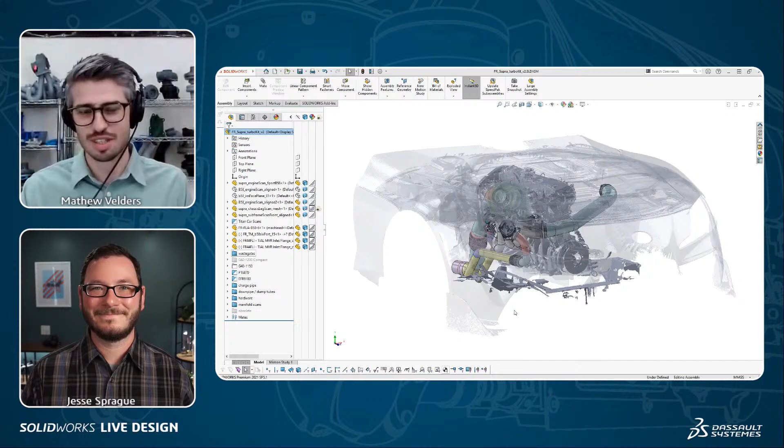It's a water-to-air intercooler, but the Papadakis racing car uses a traditional air-to-air front mount intercooler. So there's lots of important differences. So to work on the production kit, we partnered with Titan Motorsports in Florida, and they found a very generous customer who was willing to let us borrow their car for far too long to develop the kit. So thanks, Ollie, if you're out there watching, we appreciate it. We're really thrilled with how the kit turned out.

So the production kit needed to be more than just a turbo manifold. It needed to include the charge pipe for the original style intercooler in the inlet manifold. It needed dump tubes, downpipe, and so the development of the manifold into a kit had a lot of iteration. So they shipped the car to us. We work with Creaform. You may notice that this engine bay scan is maybe a little bit over the top. It was a bit more than what was needed for the turbo kit, but I was playing with a new toy and having fun with the HandySCAN, so got a little bit carried away.

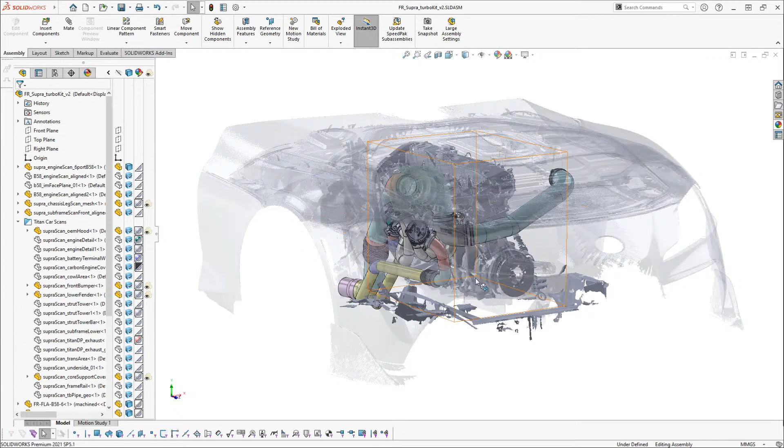So we scanned the engine bay and brought that all into SolidWorks and started with the original model that we did with Papadakis Racing, and so there was a bit of a unique use of CAD software in this, where the manifold was fully designed in CAD and mostly built to that model. But a lot of the rest of the kit, like the downpipe and the dump tubes and the charge pipe, was more concept design in CAD.

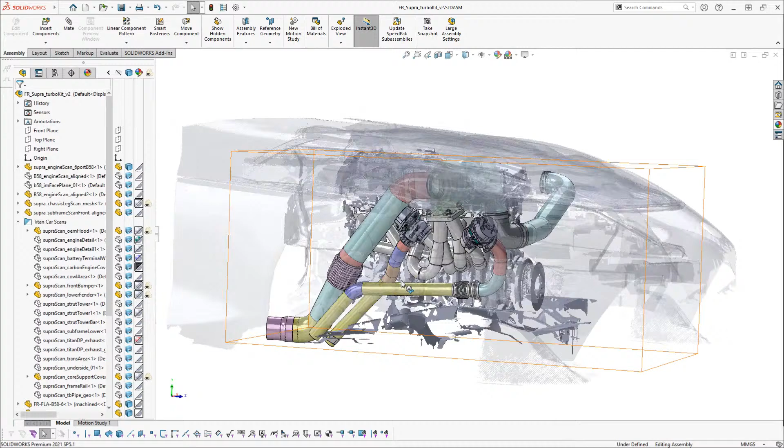And then I worked with our talented fabricators here, and we went back and forth, and they'd look at the scans and the model, and we figured out where things needed to be roughly and what we could fit. It was really important to Titan to have a 3.5-inch downpipe on this kit, and it's pretty tight and it was difficult to fit. So that had us move the turbo position around a little bit. We had to move the wastegates around a little bit.

There was not a lot of clearance in this area here, where you can see this Garrett wastegate. It's tight to the frame rail. It's close to the downpipe, and you don't want to get too much heat around this top hat here, to protect the wastegate.

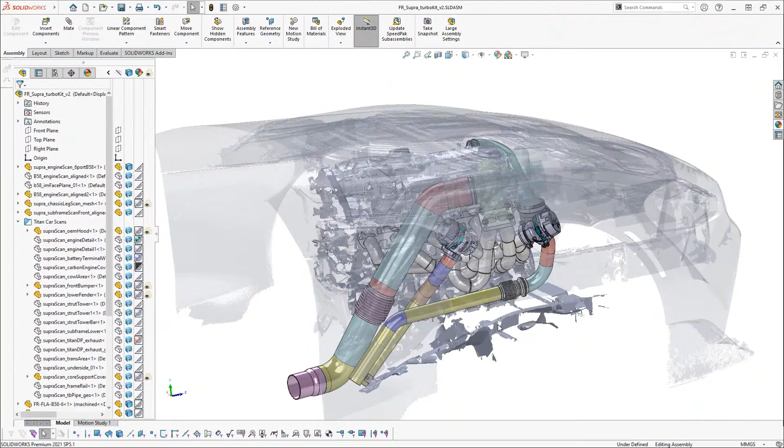So I would go through figuring out some layout concepts and what would or wouldn't fit, and the fabricators would look at it and give me feedback, and we'd go back and forth. And then once we had a good idea of what should fit and where, they took this image and went and laid it out on the actual car. And then, of course, there was a bit of back and forth.

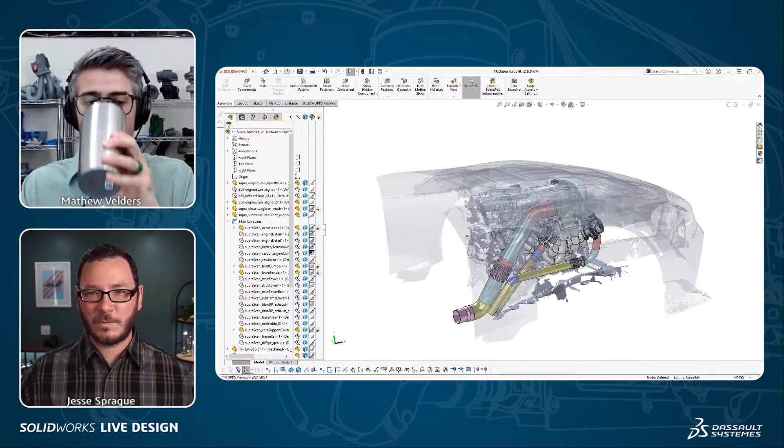It's such a great combination, alluding to what I said before of street smarts and book smarts, right? You've got this super high tech 3D scan, right? And then at Full Race, you've got the knowledge to know exactly how things are going to lay out, and joining those two together is super cool.

Yeah, and I really like to defer to their knowledge, because most of these guys have been fabricating these kinds of components on cars for longer than I've been using CAD software. So they have a lot of really good input. And I'm not going to pretend that I could do a better job in SolidWorks than they could on an actual car, but it definitely saves time to work through some of those concepts and layouts in CAD, rather than the time and material that would go into them figuring this all out. Sure, absolutely.

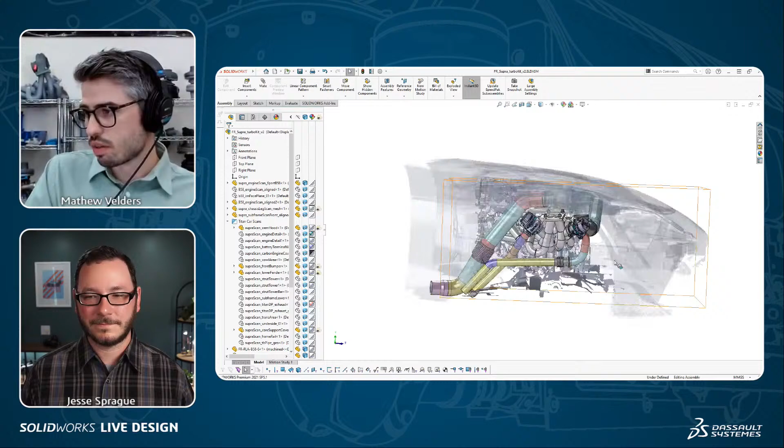Yeah, so there's a lot going on here. It's a big assembly. Well, for me, it's a big assembly. So I worked through the concepts for charge pipes and downpipes and dump tubes, and then they built something on the car, and then I ended up replicating what they built in SolidWorks afterwards, so that I could make a drawing with a cut list and a general assembly layout for the downpipes and

dump tubes. And then if we get some of the components CNC bent, we can use the models to check to make sure that they're what they're supposed to be. Yeah, very cool.

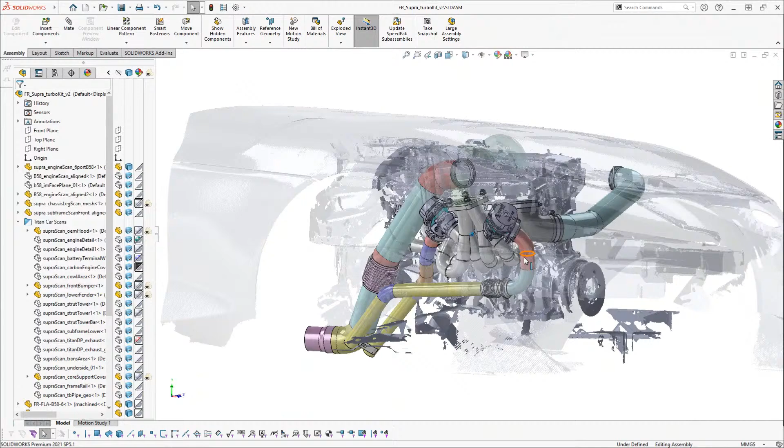So in terms of heat, you mentioned you're working on an exhaust system, so heat's a big deal. How do you guys handle that? Do you do any simulation or flow, just to see where heat might be going? I know it's probably tough because it's in a moving vehicle, so there's a lot of air potentially flowing through there as well. But are there any tools that you use to get an idea of where heat might be going, or is it just, an inch in between is going to be okay for what this component can handle?

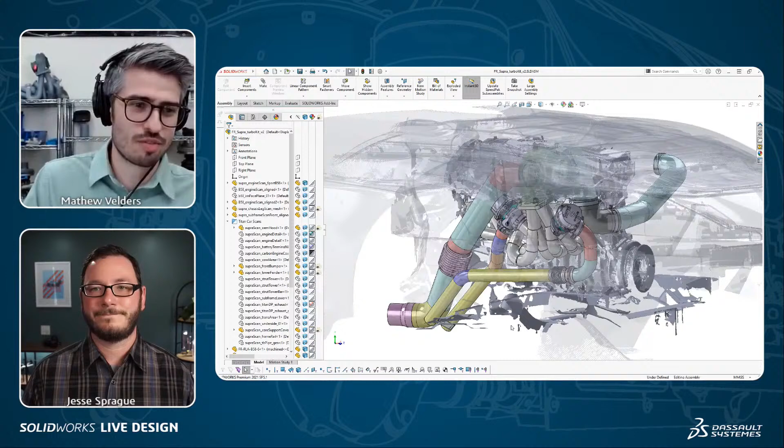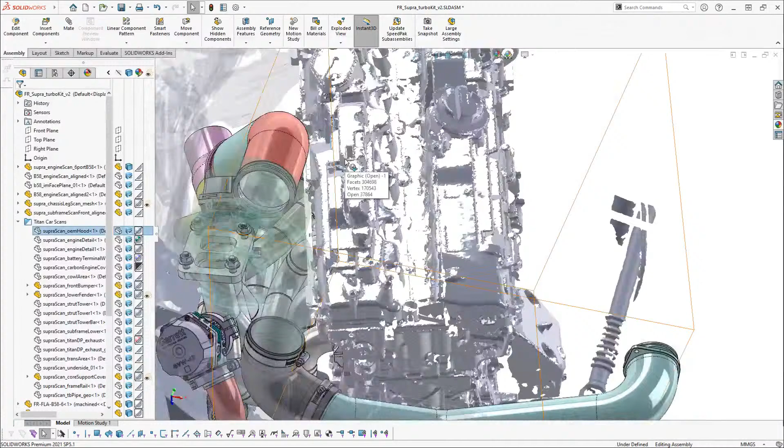I'd say it's a bit of a combination. Some of the analysis work has been done, but Full Race has been doing this for 20 years, so they've got a pretty good feel for what will work and what won't. But there's definitely concerns with this. Here, let me hide some of these scans. This valve cover here is plastic, and it can definitely take a lot of heat, but it's an area of concern for sure.

Actually, just recently, the Papadakis Racing GR86, which has a B58 swapped into it, unfortunately DNF'd at an event because their turbine housing was a little bit too close to that cover, and they thought that it would be good, but it wasn't quite. So lesson learned. Sure. Interesting.

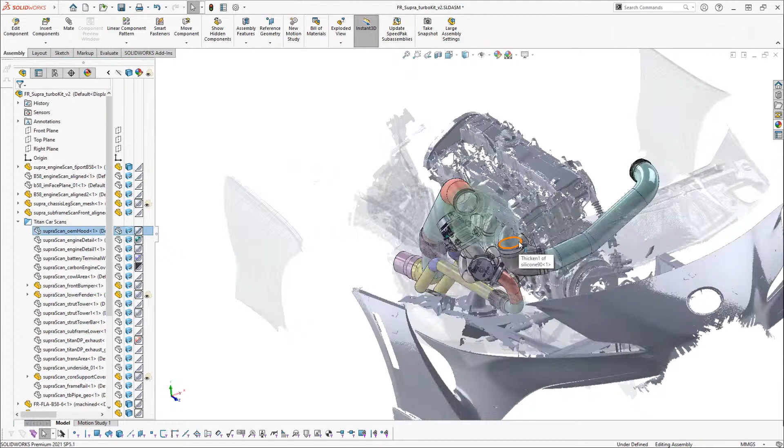Yeah, so the approach to building something like this, you could start with the scans and pick your turbo location in CAD and rough out your wastegate locations in CAD, or you could mount them in the engine bay on the physical car and pick what you like that way, and then scan the location and go about it that way. For this project, Full Race was already making a... So I guess I should back up a little bit.

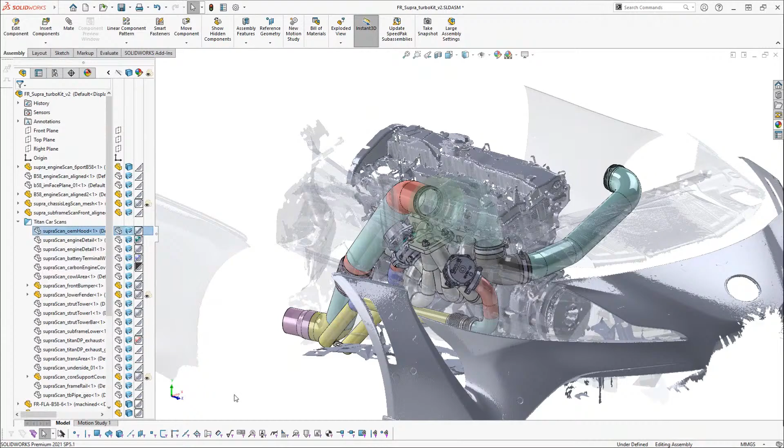The 2020 Supras had a cylinder head that only had two exhaust port outlets. Most of the manifold was built into the cylinder head. So cylinders 1 through 3 merged into one outlet, and cylinders 4 through 6 merged into a second outlet. So we were already building a manifold for the 2020 two-port cars, and we wanted to use that turbo location as the starting point for this kit. Okay. So are there two different versions of this? Because when I was looking around a little bit, I did see some like that.

So now, as far as the turbo placement goes, who was making the decisions? You said you were working with Titan. Who was making the decisions on what turbo it was actually going to be, and driving the housing size and all of that stuff? Was that you guys, or was that Titan, or a combination?

In the beginning, it was us when we were working on the initial two-port kit, and the kit was developed around a BorgWarner EFR 9180, or I guess the 9280 is the largest one that they offer, but they're the same overall size. Actually, that's one right behind me there on the shelf. So it's a pretty big turbo, and that was what the kit was based around.

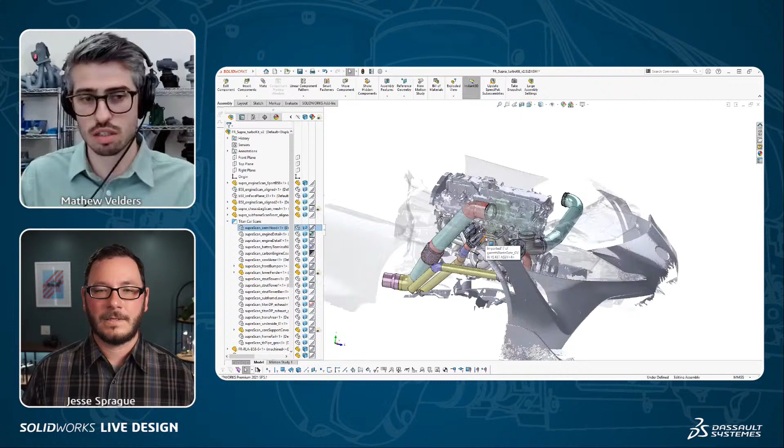Titan wanted the option to fit larger turbos, which actually wasn't much of an issue with the original turbo location, but the requirement for the 3.5 inch downpipe made a pretty big impact on the turbo location. We actually had to move it up a little bit, and it just bought us a little more clearance to snake the 3.5 inch downpipe down through and have it far enough away from the cam cover and far enough away from wiring harnesses and that kind of stuff.

Yeah. We have a question: you mentioned that the Papadakis project was 48 hours, but how long does something like this take you to model? Did you do a full model of this when you're going through that process, or did you go part way, since you already had a jump start with the 3D printed one? What was the time span on a project of building a model like this?

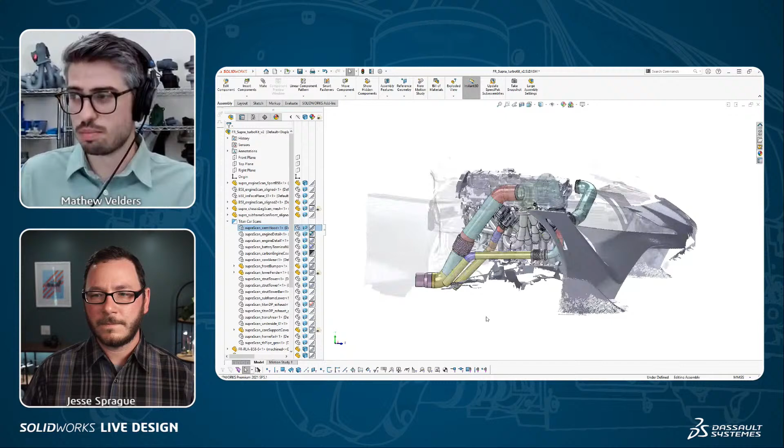Yeah, so the one that I initially did for Papadakis was like 48 hours start to finish, and that included completely modeling the manifold, a couple 3D printed fixture models to locate the turbine inlet flange to the cylinder head flange, and turning all of the solid models into CAM files that could be cut out on a CNC plasma cutter.

Cool. Normally, I would say 48 hours is not nearly enough time to do something like that and think everything through properly. And it definitely had its flaws. The wastegate positions weren't the greatest. They're not as good as they are now. They were a little bit close to the frame rails, but in a race car that's using solid or near solid engine mounts, it doesn't really matter.

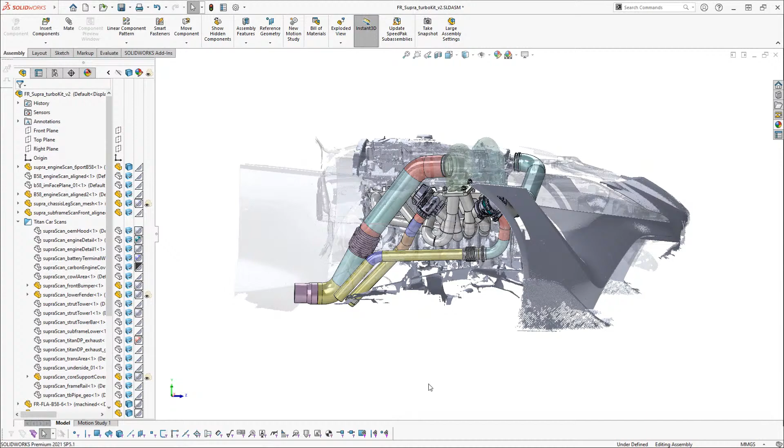Sure. Something like this model that I have here was built over the span of probably a couple months, but that includes going back and forth with this project, spending time on other projects, and juggling a much larger workload than just saying, you've got 48 hours, go. Yeah. I think our entire audience would say 48 hours is not ideal. Oh, very cool.

So we started with a scan of our original 2-port manifold, and that kind of gave me the turbo location for this one here. If I go back to the top of the tree here, once I bring a scan in, I just do a 3D sketch with X, Y, and Z dimensions and a couple angles. Let me open this up. So I've got a fully defined sketch there, and I don't have to worry about anything moving on me, and if I need to adjust, I can just move it up or down or forward or backwards or whatever I need to do.

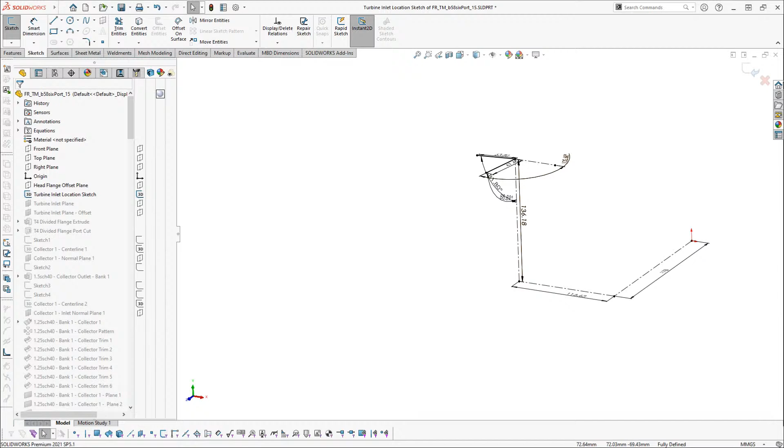So now when it comes to the scans, anytime I've worked with scans in the past, it's always like, oh, you just point this little gun at it and then you get a model. And it's like, well, no, that's not at all how that works. There's quite a bit that goes into it. So what's your process for coming off of a scan for something like the manifold that you're actually going to need to reference?

Do you go in and put a surface on there, or do you just rely on that sketch and eyeball it off of that, or what's your process there? Yeah, that's a great point. So we use Creaform's software to both do the scanning and modeling.

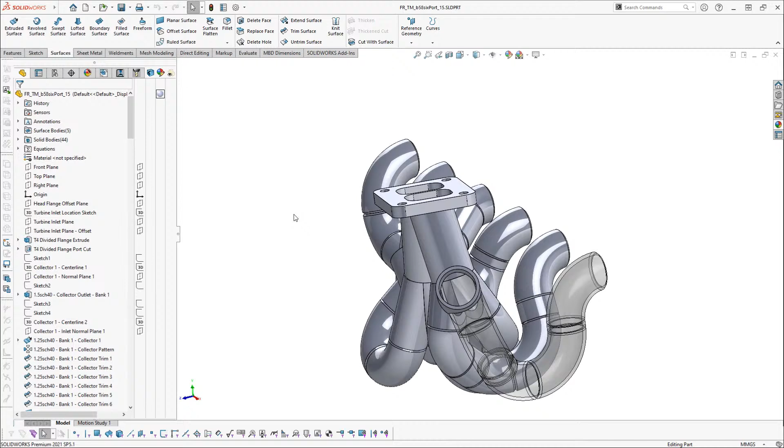It's mostly, I just like to have a mesh in SOLIDWORKS to use as a visual aid for how much space I have to work with. Yep, totally agreed there. Cool. Yeah, so the scanning and reverse engineering part for what I'm doing is really pretty quick and simple, because I just need to get a mesh, get a few locating features, and then I can move on with the design work.

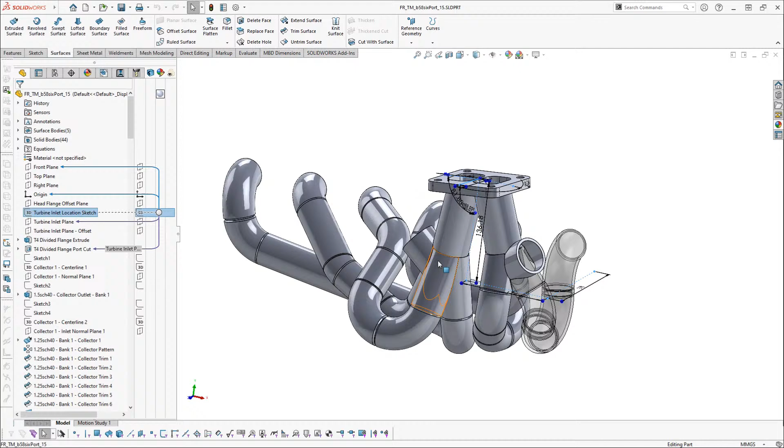But yeah, so from there it's just a lot of 3D sketches constraining the T4 flange location, some simple extrusions for the flange, some cuts. It's all pretty just bread and butter SOLIDWORKS features. I've got a 3D sketch to locate this collector piece. And yeah, I just kind of keep going through and locating everything with 3D sketches.

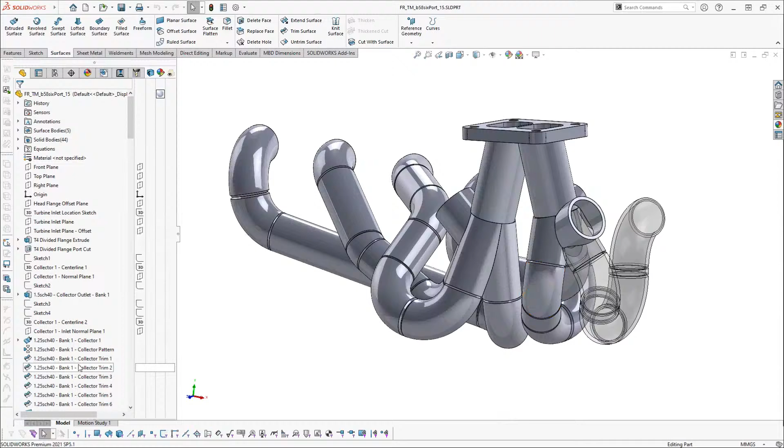I really prefer to work with surfaces rather than solids. It's just what's happened over the years, but I tend to model everything as surfaces and do surface trims. Let me hide a couple things here. So I'll build this up as surfaces, and then you get these cut faces.

Sometimes you do get a nice little extra bit of flexibility there with surfaces as long as you know your way around the surface tools. I feel like a lot of people shy away from surfacing because it seems like this big scary thing. But when I was teaching it, I would always encourage people to go in and look at the first few features. It's the same stuff as what you're doing with solids, right? And it gives you extra flexibility, so you can dip your toes into surfacing pretty easily and feel it out.

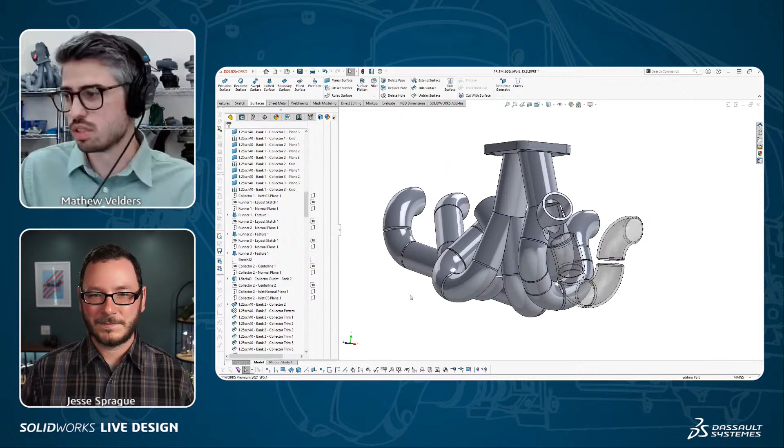Yeah, I was definitely guilty of that as well. I was a bit intimidated by the surfaces tab and avoided it. But I had someone I worked with years ago that was a great mentor. He was like, "What are you doing? Stop what you're doing. Just start using surfaces. You'll get used to it, and then you'll end up loving it." And he was definitely right.

I always said surfacing is kind of like speaking the language of SolidWorks, because it's doing surfacing in the background. So if you don't know what it's doing, you're just letting it do its thing. But if you can build the surfaces yourself, sometimes you've got a lot more control. Yeah, so it's a really long design tree, but it's just lots of surface cuts and 3D sketches. All of the runners are built with 3D sketches.

I notice you're using folders in your tree. That's always good. Try to keep things organized. Yeah, and this isn't my most organized tree. There's a lot of stuff flying around everywhere, but the folders are definitely a lifesaver. Keep you from getting confused.

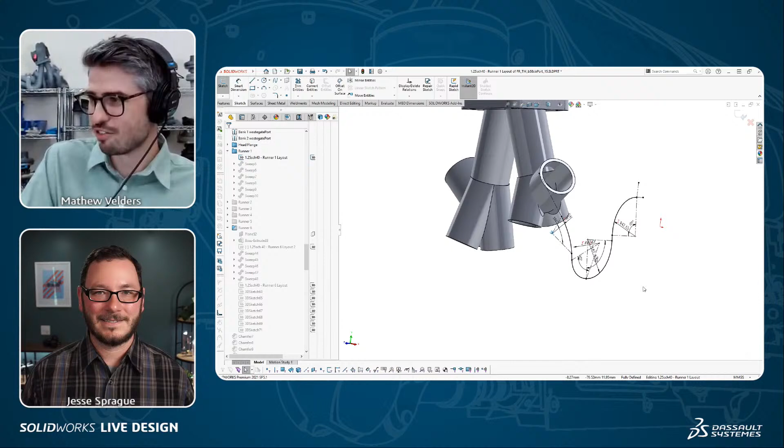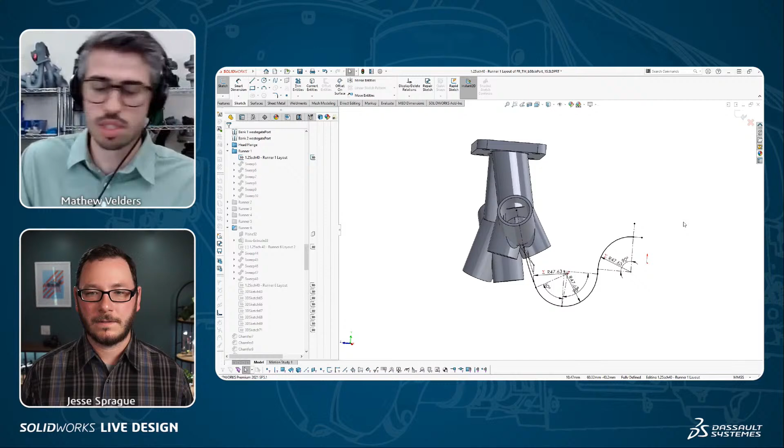So this is runner number one. I like to set up equations for the center line radius and OD and ID so that when I'm dimensioning things, I can just hit the drop down and select a radius or a pipe size. Okay, so are you using global variables or what's the equation doing? Yeah, it's just a global variable. Once I hit smart dimension, I can start typing the name, autofill it and move on. That's smart. Because with a fabricated manifold like this, you're stuck to the inch and a quarter. We have long radius and short radius.

We don't really like to use the short radius if we can avoid them. And if I remember correctly, I don't think this manifold uses a single short radius. So that was a job well done, I guess. Yeah, and that's just a factor of bending the pipe, right? Just physical limitations of actually making those bends.

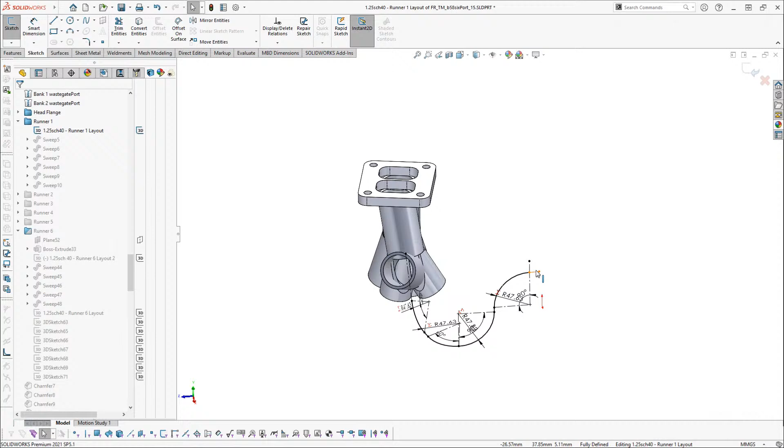Yeah, and these are actually pipe, it's a Schedule 40 pipe. You can get custom sizes, but the off-the-shelf long radius bend is really an ideal size to be using for something like this. Gotcha. Yep. So I worked through the model with a 3D sketch for the center line, which is nice. You can go back afterwards and calculate runner lengths and do whatever you want to do with that.

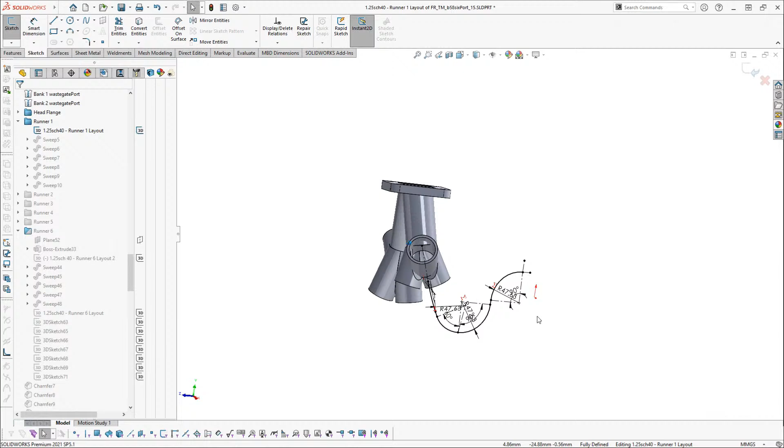And I do the whole runner as one 3D sketch, and then I like to create the actual runner as separate sweeps. Okay. Yep. And then each sweep represents one, like a 90-degree bend or a straight section. We prefer to work with 90s, 60s, 30s, 45s, occasionally a 22 and a half, but we like to stick to those because then we can just have them pre-cut and ready to go.

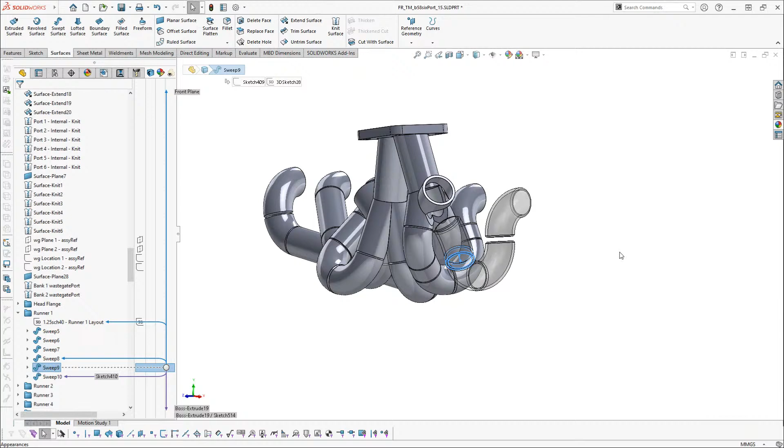So yeah, it's just a big puzzle, one runner at a time, and it kind of seems like you'll do something for the first runner and then the second one, and then by the time you get to the third one, you realize that none of the first part was going to work. And then back to the top you go, rework the collector, rework the runners, and it's just that back and forth dance up and down your model tree until you get to the end.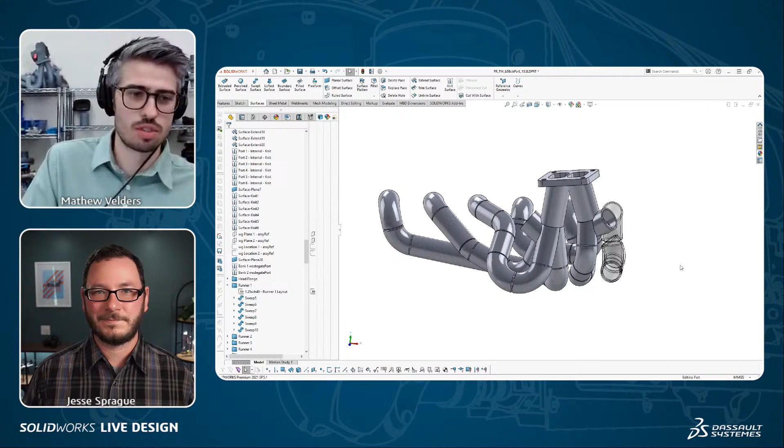Yeah, absolutely. Now, are you looking to balance the lengths of these, or is it just what is going to purely fit in the car, or what's your approach there? I guess there's a few schools of thought when it comes to the runner length topic. A lot of people would say that equal length is everything. A lot of people say it doesn't matter. I kind of lean somewhere in between.

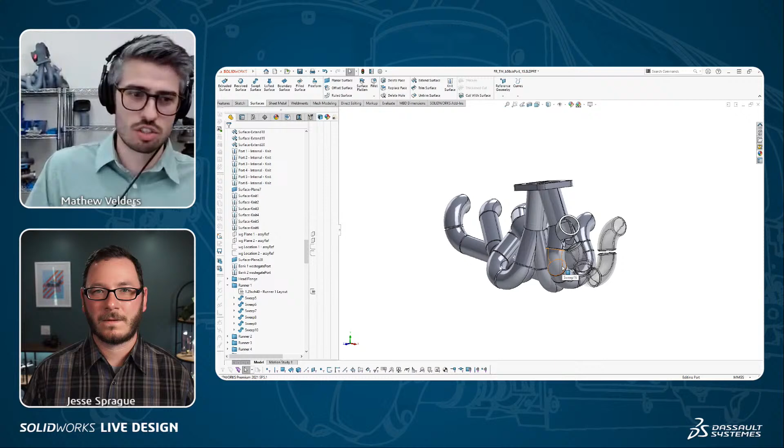This manifold, if you look at it, you can see it's not quite equal length. Number 6 is quite long, number 1 is quite short. It's not that it doesn't matter on a turbo engine, but it's not as critical. My opinion is that if you can balance the amount of bends versus straight lengths, there's a happy medium. Runner 1 here is quite short, but it's almost entirely bends. And runner 6 is a lot longer, but there's a lot more straight section. So back pressure more than anything, you're thinking? Yeah, try and balance the pressure out.

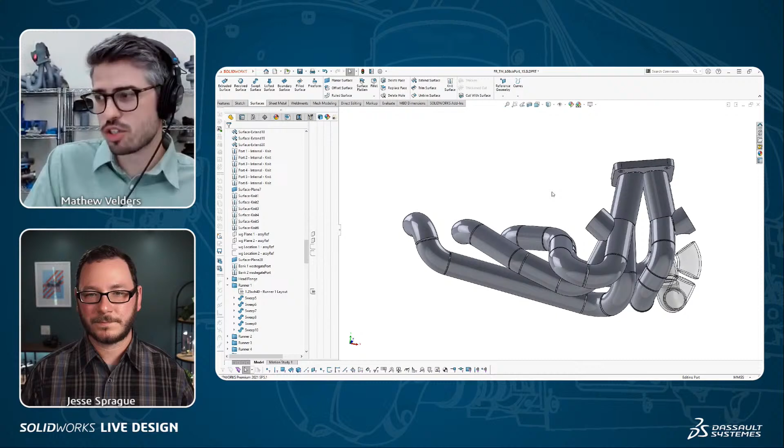But to be honest, the design of a manifold like this is probably 80% driven by fit, the limited space that you have. I put as much effort and care into runner lengths and bend angle counts as I can. But at the end of the day, you have to stick with what will fit and what the fabricators will make, because you don't want to have a shop mutiny on your hands when you make some manifold that looks like spaghetti and costs so much to make that no one could ever buy it.

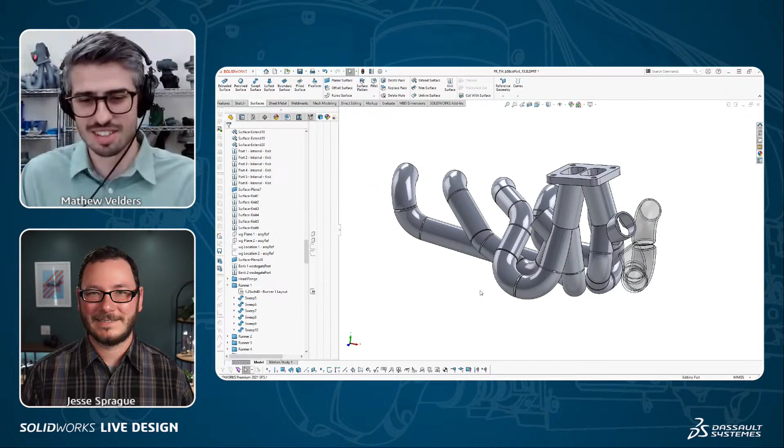I did start down that path. I thought, I wonder if I could make one that's equal length, and it was cool looking, but someone could make it as a one-of-a-kind manifold, it's never something that can be a production unit in any quantity that makes sense. So that was abandoned, but it's not too far off.

Very cool. We had a question from Robo CNC about what scanner you're using. You said you were using HandyScan, is that right? Yeah, it's a Creaform HandyScan 700. It's one of the older generation laser scanners. I also have a GoScan 20, which is one of the really old structured light type scanners, and it works really well for small objects, especially non-shiny, non-metallic objects. But when you're trying to do a nice detailed scan of an engine bay, or scan a manifold and see how it compares to the CAD model, you can spray parts with powders and go through all that, but yeah.

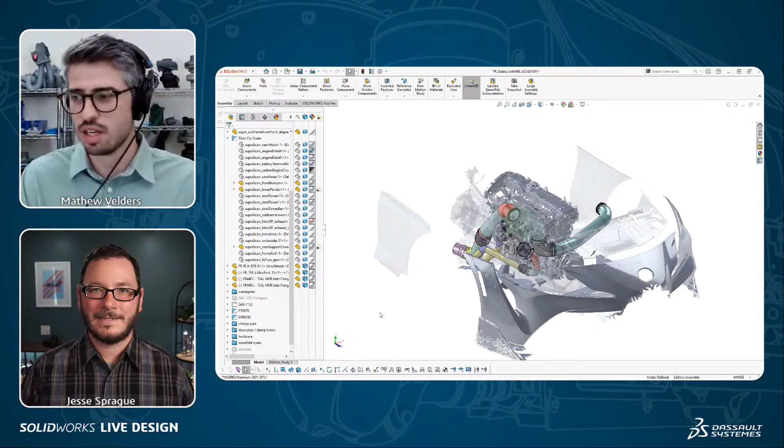The laser scanner is great because you can just scan away and it doesn't care if it's reflective or not. It gets a good scan, so it's definitely a big time saver. Yeah, for sure. Scanning can definitely be finicky and frustrating if you've got a scanner that's fighting you along the way. If you're going to do much of it, it's probably worth getting something that works well for your needs.

Yeah, and it's nice. We were using a car that belonged to a customer of Titan's, and I really would prefer not to be spraying their car down with some sort of white powdered spray. It's nice to just be able to stick some dots down that don't leave any residue, and then get in, get the scan, and get out, and not do anything too cruel to their car.

Right. Yeah. And they did that, I think, in the Papadakis one, right? They used a Faro arm, so they ended up spraying it, I think. But yeah, when you're working on a customer car, that's a great point. Yeah, it's a huge help for sure. Big time saver.

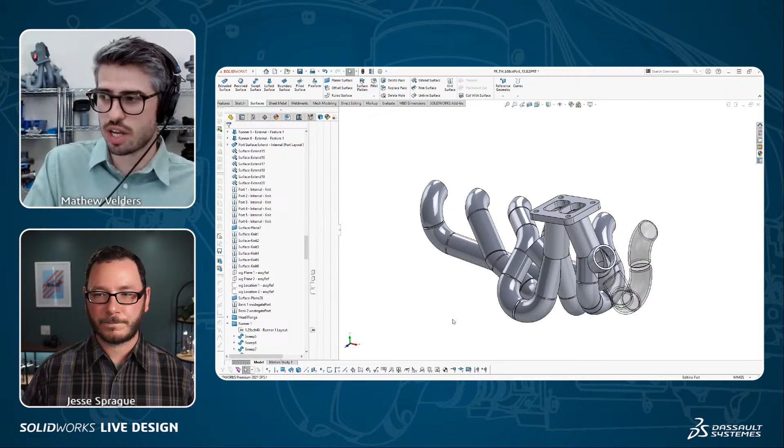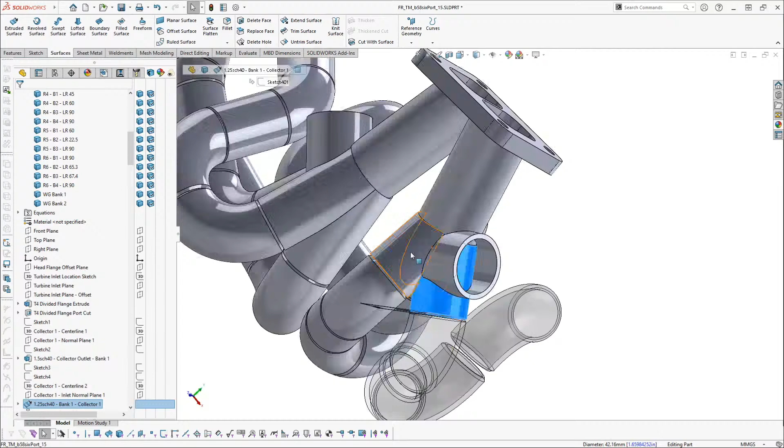Yeah, so this is the manifold model. Lots of sweeps, lots of 3D sketches. I guess one thing that's kind of interesting: in the past, we usually would have two fixtures, one for the collector portion, which for those of you who are not aware, the collector is where the flow from the 3 or 6 runners collects together and merges into one section. So we've got the collector piece 1, 2, and 3 here. So from these 3 pieces upward to this flange, and these 3 pieces here up to the flange, and the wastegate tubes are the collector.

So we have a collector fixture that the guys use to fit everything up and weld that, and then there's a separate fixture that the collector gets bolted to, and the head flange, which isn't in this model, gets attached to that fixture, and then they take the list of straights and different degree elbows, and they connect the dots and build it.

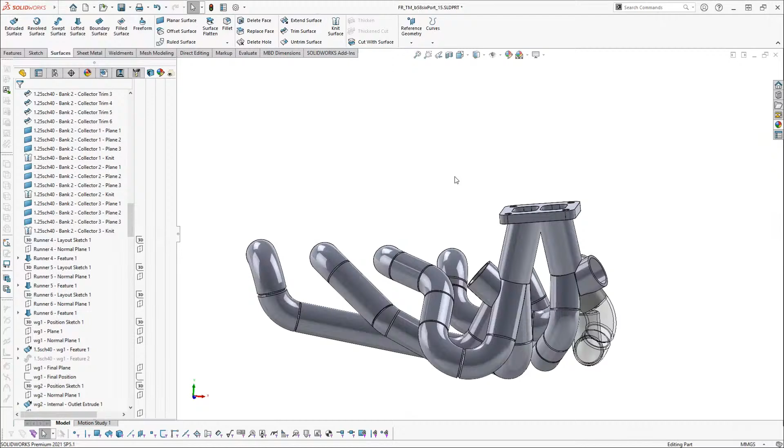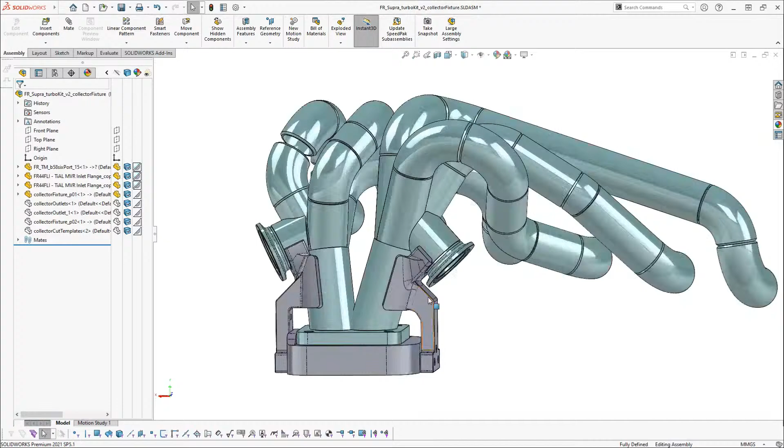But it kind of started with the Papadakis project when we were in a big rush, and we hadn't tried it before, but we decided to make a 3D printed collector fixture. So this is the model, and this gray piece was designed to all be 3D printed in plastic, and these arms screw onto the side, and it locates the two merge pieces here. It has a feature to locate the wastegate tubes, and then we have another tool that they use to assist with orienting the collector.

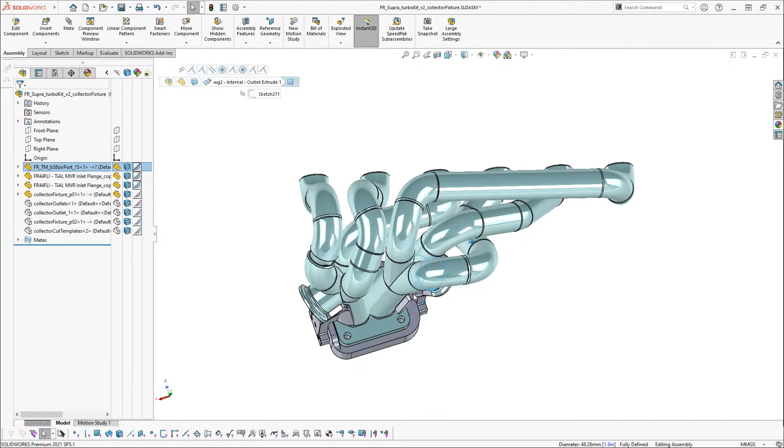But realistically, since we're cutting the pieces out with a CNC plasma, if they put this wastegate tube into this collector, they can rotate the wastegate tube and the three into one merge portion until they line up, and that gives them the location. But it's definitely an art form, and once they weld the collectors and start welding runners, everything moves and shifts a little bit, so they need to accommodate for all that. So they don't build it exactly the way it's modeled, but it's amazing how close it turns out.

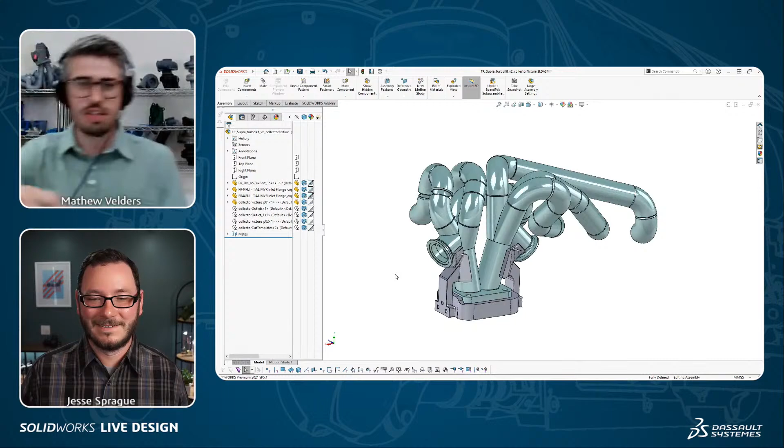Yeah, that is really neat. So these are just regular FDM prints that you do in-house, is that right? Yep, just with PLA. Actually, I have the PLA. Wow. So this is the original one that I created, and I only intended it to be a temporary piece, but it worked pretty well, and they just kept using it. So it's been modified a little bit.

You can see, these collector pieces that merge into the flange have to be deformed. This is just a perfectly round pipe, and this port shape is very rectangular, so they need to make those two pieces connect smoothly. There's a lot of crushing and air hammering and manual labor that goes into making that a nice smooth connection. And where the pipe gets flattened and widened around the bottom of this fixture, I had gotten a little carried away and didn't leave them enough space, so they just modified it.

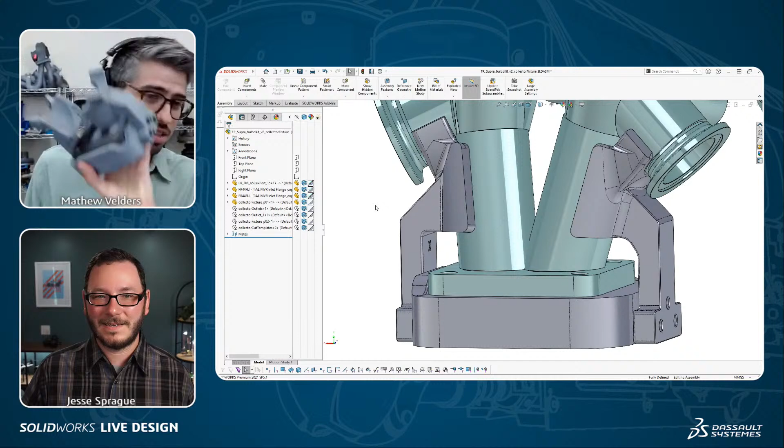But it's still going. I've been wanting to print them a new one with a carbon fiber nylon filament, something a bit more durable, but this works amazingly well. So it's pretty accessible, and it really works.

Yeah, that is super cool. We were kind of talking at the beginning about that blend of old generation and new generation of tools, right? But the printer, the stuff that you can do just in fixturing, there's so many applications. It's so cool when it turns out better than you expect, right? You throw something together and this is incredibly helpful. Definitely. And if it breaks, you just print another one, right in house. Yeah, and it's like a few dollars in plastic, and it saves a lot of time.

The guys love it. It's been really fun working with them on some of these types of projects, because it's nice to be able to quickly make tools that save them lots of time and effort, and it's a really instant gratification type project when you can just make a little tool that saves them some time.

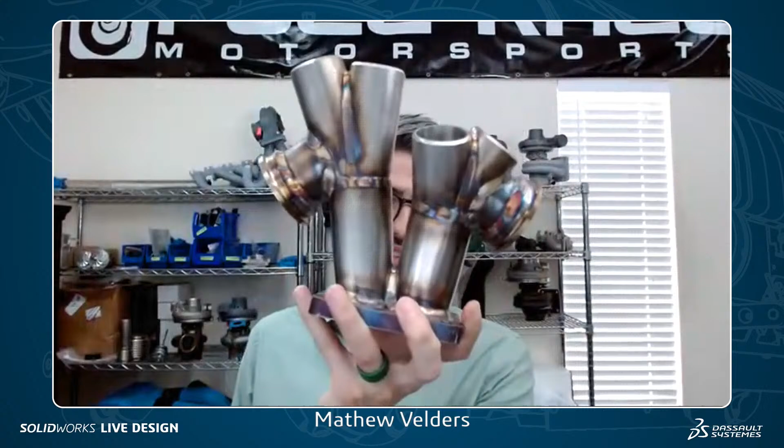Yep, that's really cool. So this is one of the finished collectors. Wow. That came out of that plastic print. Yep. And you can see everything's all been crushed and deformed to match that port shape really nicely. I guess I should zoom out to the model here and see if people can get a bit of a look at both at the same time. So that's the finished collector there.

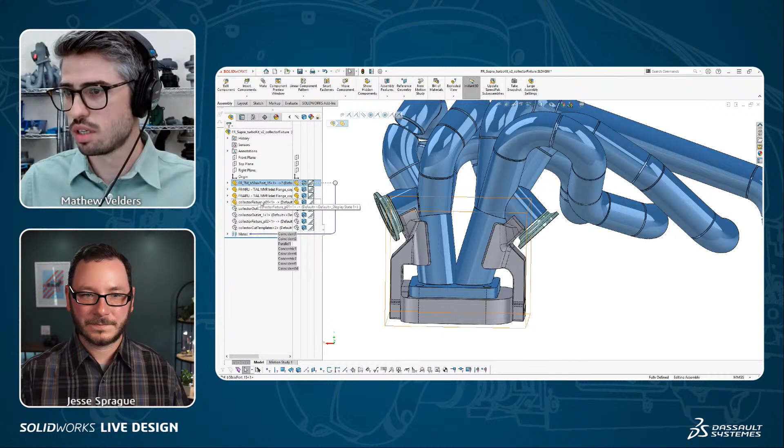And then from there, we use a CNC plasma to cut out any of the straight pieces and any of the collector pieces. So that actually uses 3D printing as well. What would be the best way to show this? I'm going to hide this fixture. I'll hide these flanges, and I'm going to hide pretty much everything. Actually, I could probably just isolate something, can't I?

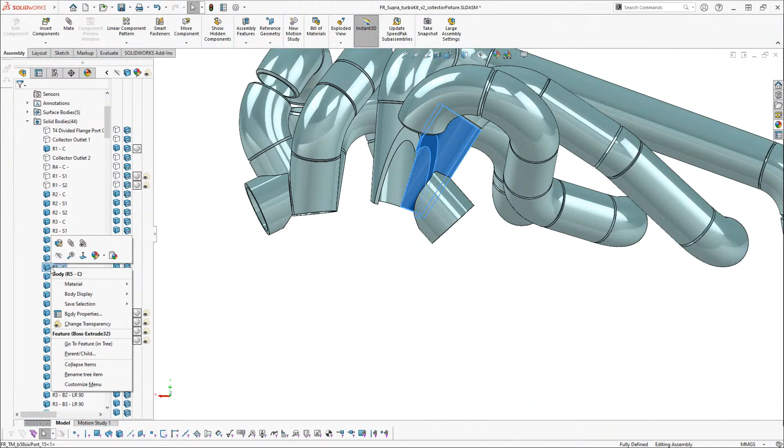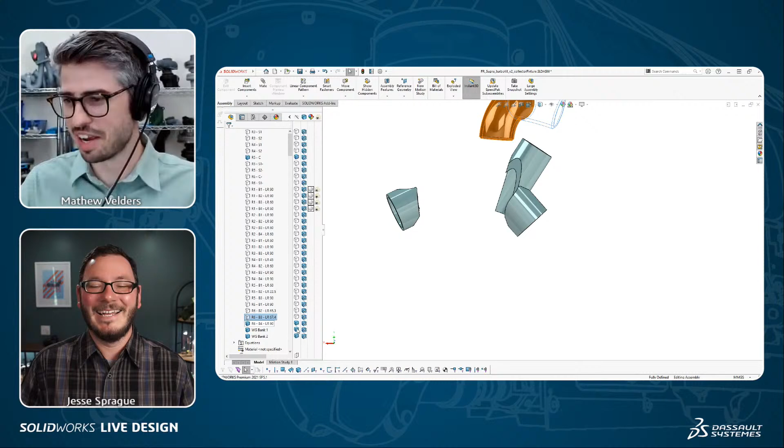It's funny, I've been using SOLIDWORKS for years, and only a month or so ago I realized that there was an isolate tool, and it's been saving me a lot of time, and now I can't find it. That's embarrassing. It is funny how things like that happen, because you were saying earlier you're self-taught on a lot of things. I'm self-taught on a lot of things too, and sometimes you miss things that seem really obvious, but you just haven't come across it, right? That happens to me all the time. Yeah. It's like, oh my gosh, how did I not know that? Where has this been the whole time? Now it's sitting right in front of me. I don't know how I didn't see that this entire time, so a bit of a fail on my part. I've advertised the isolate tool, I can't even find it, but I'll do it the old-fashioned way.

So when these pieces get cut out, this is a plane, and this is a plane, and this is also a planar surface. Okay. But with the CNC plasma, there's a piece of tube like this, and the cutting torch can only ever be normal to the tube. So as the tube rotates and it moves and cuts, it can't actually cut that exact shape out with the flat planes. So the plasma saves a ton of time getting a rough shape, but it's not actually the final shape that you need to have everything fit together properly for TIG welding. So this is how it comes out of the plasma.

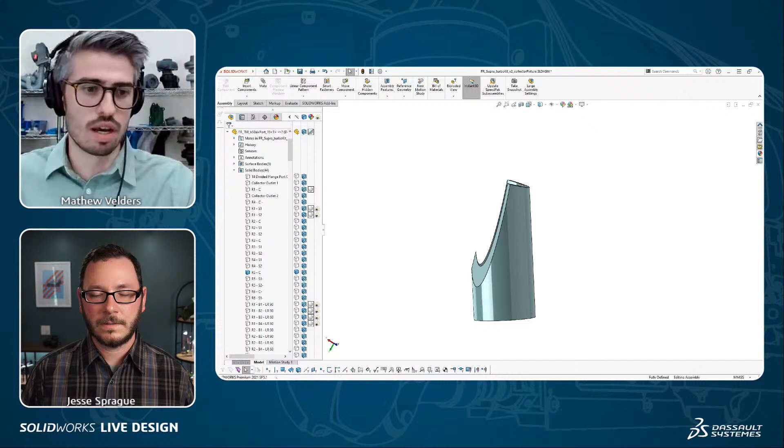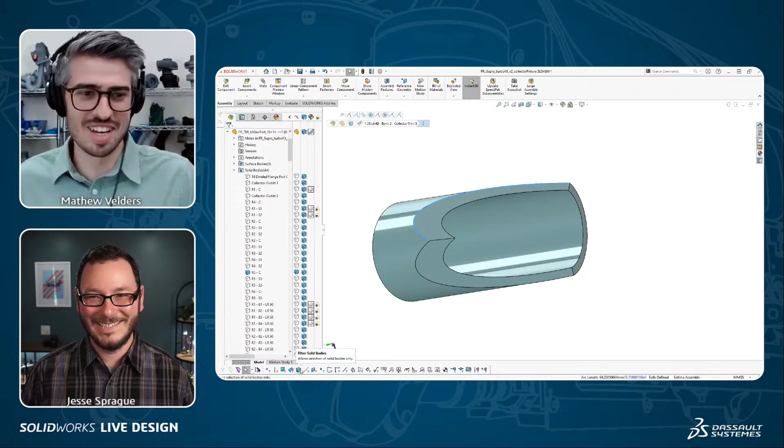And then I also printed some PLA sleeves so they can slip this over the CNC cut tube or pipe, slip the sleeve on, use a Sharpie, mark the edge. The way that it cuts, I have it set to cut the profile of the ID, so the ID of the cut piece should be pretty spot on. Yep. And then the Sharpie line gives them this outside profile on the OD, and they can just use a big belt sander to take care of the rest. Yeah. But it saves a ton of time.

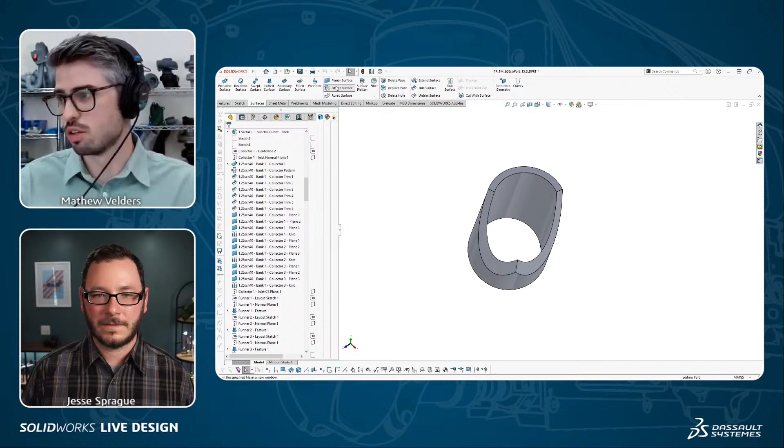So part of the process of designing a manifold like this is for me to prep those files to be cut as well. Yeah, that's really neat. So the way that I usually do that is I just do a surface offset of 0 millimeters, and that gives me the inside profile.

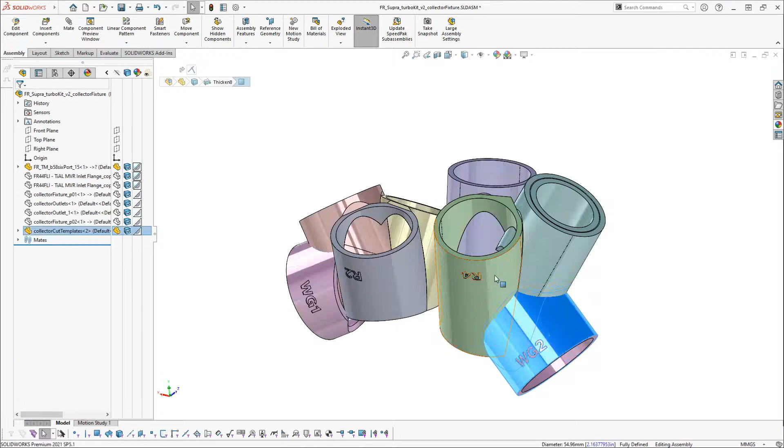And then once you do a thicken, say it's like 3.5 millimeters wall thickness, you get that same sort of shape that the plasma cutter can do. Very cool. And then I create the sleeves to go over top with, really, it's more just surface offsets and cutting with a plane. So these are all the printed sleeve solids that slip over top of the wastegate pieces and the collector pieces that they can cut out.

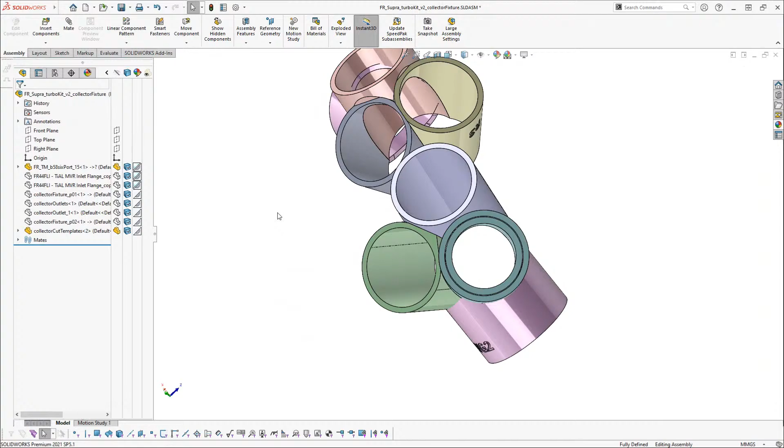And I mean, you don't need to use a CNC plasma to do this either. You could model a collector in CAD and use one of these sleeves to mark out the lines and cut it with a bandsaw or an angle grinder or whatever you want. You can get the same result. The CNC plasma just saves us a lot of time. Right. Yeah. I think there was some chatter in the comments about water jet potentially. Yeah. There's a lot of ways to get that done right, but yeah, that is cool.

And there are tools that could cut the pieces with the planar surfaces, but there's kind of a balancing act between how much we use it, the cost of the machine, et cetera. So we landed on the CNC plasma, and it was the right price, and it saves the right amount of time. So that's where we landed on that. Yeah, manufacturing is always a balancing act, right? How long is this taking? Is it worth buying another tool to do it? Right.

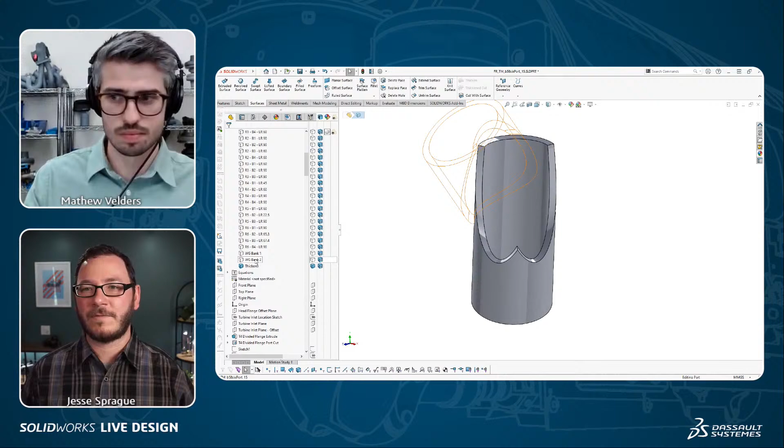Exactly. Cool. But that's a great way to kind of get the best of both worlds there with what you're doing, making a marking fixture that saves a ton of time. That kind of lands you right in the middle, right? You're using a 3D printer on top of the plasma cutting method to try to shave some extra time off of that, which is really cool.

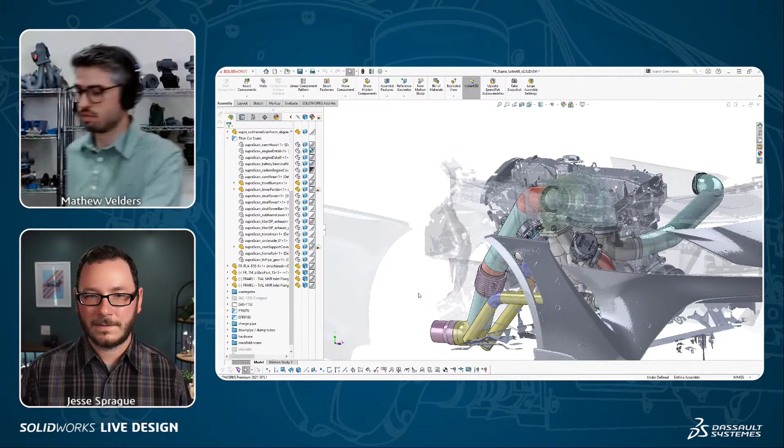So once we have the collector made in the 3D printed fixture, it goes on to the second fixture where they mount the collector and the head flange. I didn't drag that one out here, but from there they have a list of bends, and the plasma cuts out the straight sections, and they just have to start connecting the dots. So they will end up creating something like this, which, let's see if I can on the spot figure out which runner this is. I want to say this is probably runner number 2. Yep, this guy right here.

So they fit it all together, tack weld it, and then it goes on to a CNC robot welder. And the finished runner comes out like this. Cool. They're really beautiful, flawless welds. And is that done at Titan? Nope, we do that in-house as well.

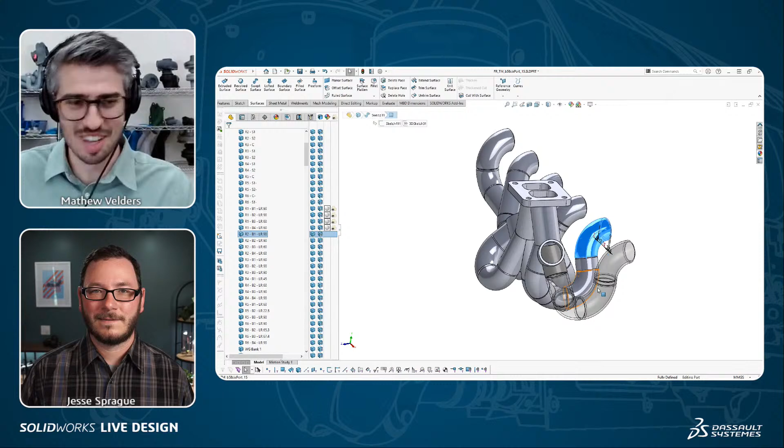Cool. Really neat. Yeah, the partnership with Titan, I mean, they're probably one of the most well-known names in Supra drag racing, and so they were a great partnership to get us the car, provide some feedback on what turbo sizing they would like to see for their customers' goals. Gotcha. And then we essentially produce the kit for them. So if you want to buy one of these kits, you can head over to their website and pick one up. But yeah, we do all of the design and manufacturing of these manifolds in-house. Nice, that's awesome.

So once the runners are all robot welded together, it gets connected to the 2 flanges, and this is the finished product. That is so cool. Making all kinds of noise, banging things around. But yeah, so that's kind of the 5-minute overview of how the manifolds get made. That is really cool.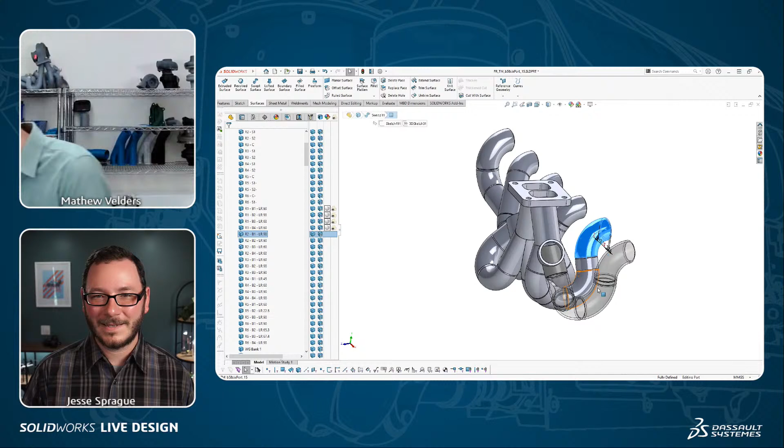And I see Jeff is commenting in the comment section that you got Fredric Aasbø driving the car for Papadakis. So you've got quite a test driver there for the first run of these. He's definitely the winningest driver in Formula D, I think, still. So you've got a guy who knows what he's talking about testing the first round. Yeah, you couldn't ask for a better partner than Papadakis Racing to use and abuse some of your products and make sure that they work. Absolutely.

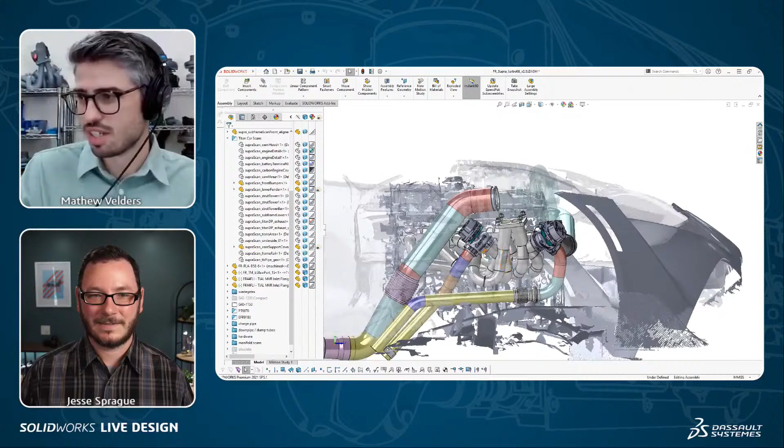But yeah, the rest of the process was just a lot of back and forth with the fab guys and SolidWorks, and we wanted to make sure that the Garrett wastegates could fit, that the TurboSmart wastegates could fit, and the Tial wastegates could fit. So they're all fairly similar in overall dimensions, but that was a bit of a balancing act. It's just a lot of constant balancing of variables. Yeah, and especially with a piece like this where you're working around other people's geometry, like you said too, right?

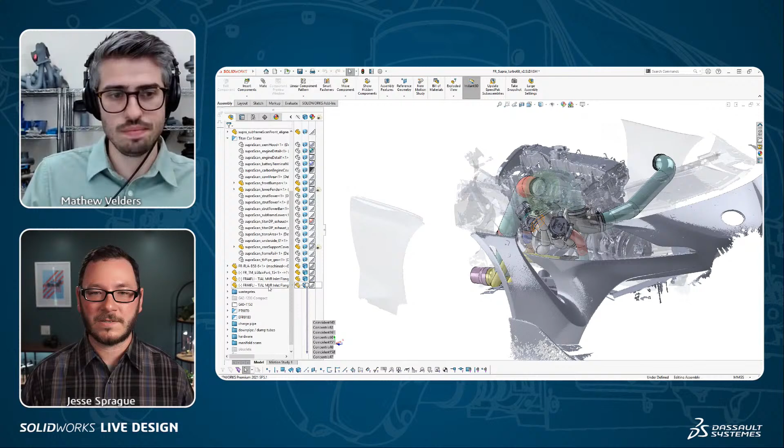You're trying to make it as universal as possible because not everybody builds their car the exact same way. So that is an interesting consideration too, that most of the time you have a production unit that you just build the way it's going to be and then it goes out the door, right? But this is specifically for applications where people are putting their things together differently. So that is an interesting point too.

Yeah, definitely, because wastegates are one of those topics where certain people swear by one brand and other people need to have a different one. So it was important to get all the major wastegates to fit. Yep, very cool.

It was kind of a bit of an experiment that worked out pretty well, which was the charge pipe. We did a 3D printed fixture for this as well, just to create the prototype one. So it was the same idea. It was all printed in PLA, and it allowed us to quickly put together a prototype charge pipe.

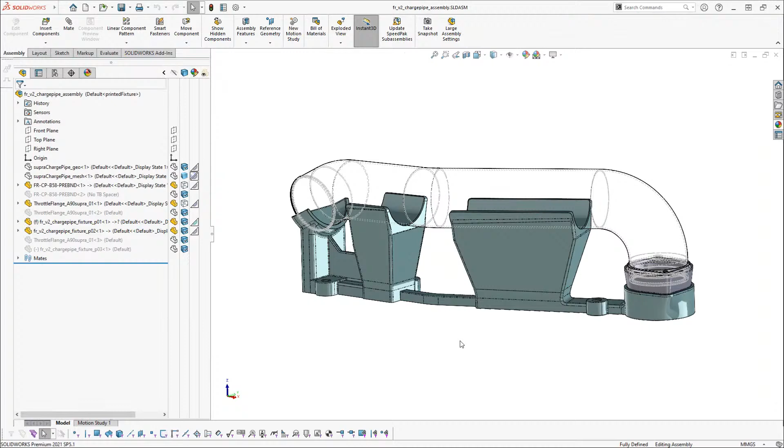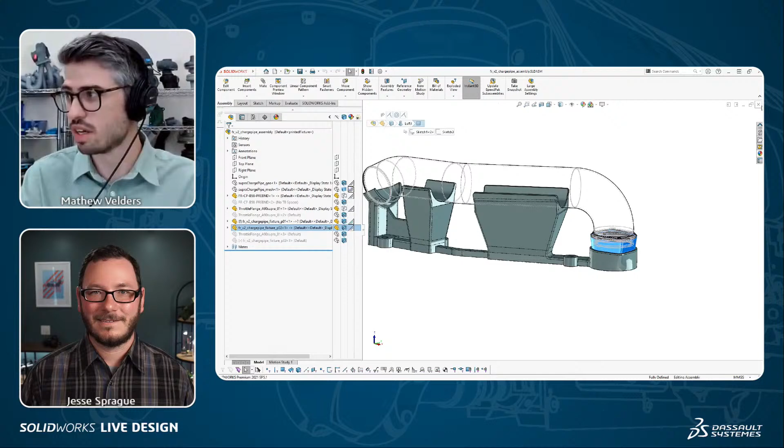And we ended up changing the design a bit for the production piece to give a little bit better clearance around some of the water lines and things that didn't pick up so well in the scan, but it definitely was a good head start on the charge pipe. It just goes back to the power of an inexpensive 3D printer. We made this fixture, we had a spacer for different throttle body spacer options, and we just kind of played around with it until we got the charge pipe that we liked. Yeah, very cool. There's so much power and flexibility there with printed stuff.

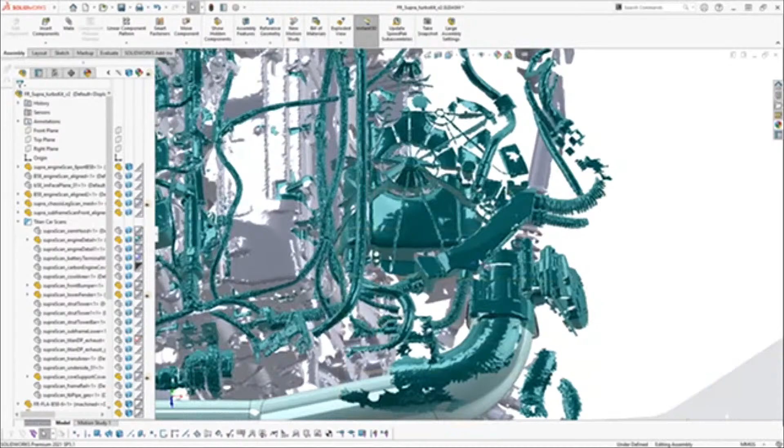Now, this kit, you mentioned earlier that Papadakis had a full intercooler and everything, but this kit is designed just to work with the standard intake with the built-in intercooler on the stock Supra. Yeah, exactly. There's an additional scan. This right here is where the throttle body lives, and this big brick section, I don't have a complete scan, but it's all air-to-water charge air cooler with little short squat runners coming right out of the core into the head.

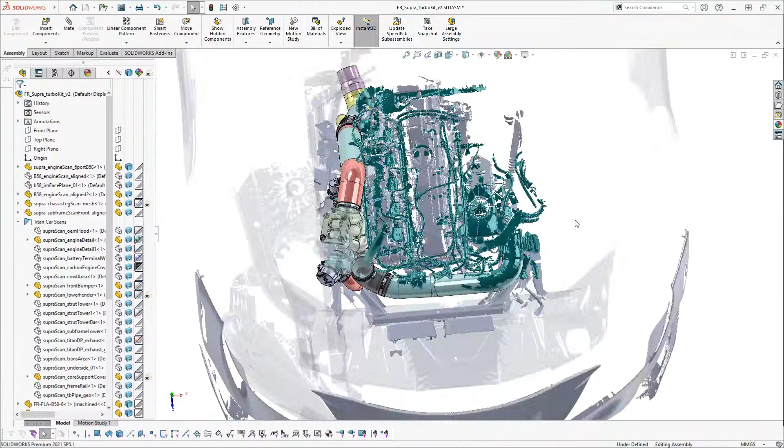Yeah, when I was looking at that, that must have been a fun part to design too. It's got all kinds of crazy ribs and stuff on it with the intercooler built in. I'm sure that was fun for the OEM to build. Yeah, it's a pretty impressive piece because it's all plastic, but it's got the metal core in it, and it's different parts that are bonded together. It's a really cool piece of design. It'd definitely be an interesting challenge to work on something like that. It's pretty neat.

If you're watching and you haven't seen that part of the Supra engine, it's pretty cool. You can look it up, or if you watch the Papadakis engine breakdown, you can see it in there a little bit when they built their engine. It's a cool design. Yeah, and it's great for something like this. You have a nice, simple, short charge pipe, so you don't have flow losses through that whole system.

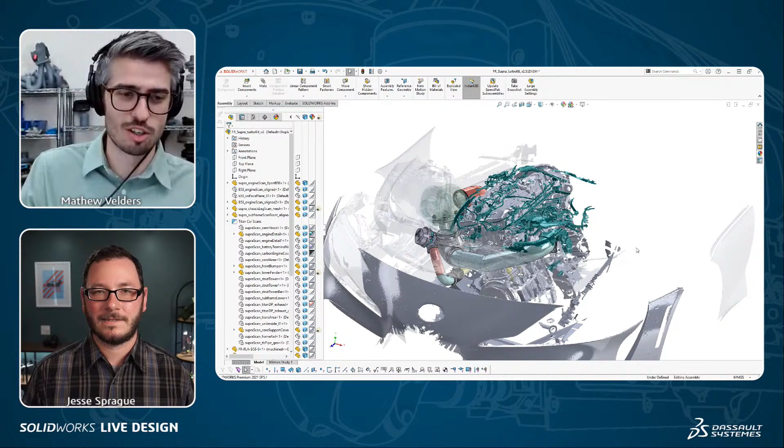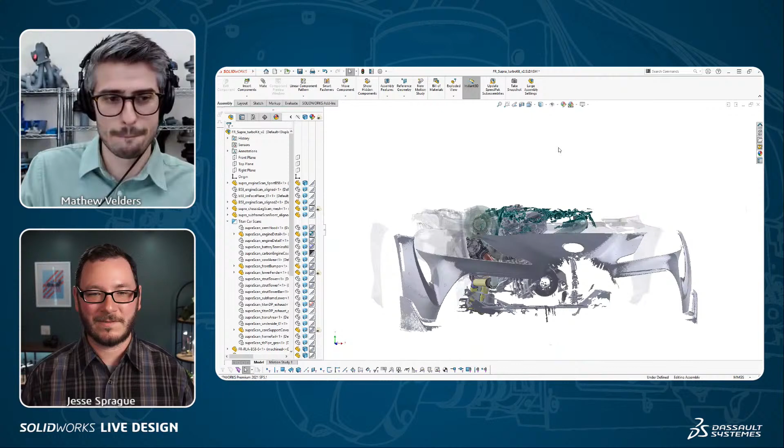Yep. It seems like the OEM intercoolers support quite a bit of power, but of course the aftermarket now has options. CSF has an all machined billet aluminum intercooler intake manifold with the same mount locations, so that works perfectly with our turbo kit and gives quite a bit more cooling capacity. It's amazing to see what people are doing with this platform. Yeah, absolutely. It's still relatively fresh to the market, so people are still digging into it.

And now the 6-speed is available, which is cool. I'm a stick shift kind of guy. I am as well. But I guess for something like drag racing, like for the guys at Titan, it's hard to beat an auto.

Cool. So, what kind of numbers does this make? Do you have any dyno info on this yet, or customers running these? Yeah, the best dyno sheet I have was a great test. It was Papadakis Racing again, and they went directly from the 2-port manifold to a 6-port head with the 6-port manifold. The only thing that changed was the head and the manifold: same turbo, same cams, same everything, just the head swap and the manifold swap.

And I think they picked up a little over 200 horsepower at the rear wheels. Wow. Yeah, without nitrous. Yeah, same turbo. So the 2-port head works well, and you can make a lot of power with it. I mean, I think Steph was probably the first person in the world to demonstrate the 2-port head could make over 1,000 horsepower, but the 6-port head's definitely a better way to go.

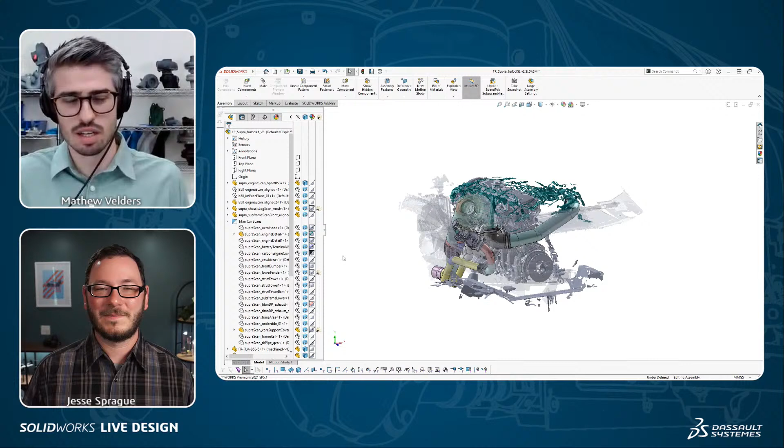Yeah, that is significant. Oh, and I guess the number that everyone wants to hear, I think without nitrous he made 11 or 1,200 horsepower at the wheels. Excellent. So Titan has their shop car, I think, making around 1,100 wheel horsepower as well. So yeah, and for people watching, the power delivery, your role in getting the power to the ground, is really important for the driver in Formula D, right?

Because you would assume, not knowing much about drifting, you would just make the back really stiff and put some hard tires on it and just let the back end swing around. But that's not at all how those cars are set up, right? They're basically like time attack cars that are super, super grippy, and it's really up to the power delivery to overdrive that. They've obviously got their hydraulic brakes, but what you have assisted in getting the driver is the critical piece of actually driving a car for Formula D.

Yeah, it's amazing how much grip it takes actually to have a car going sideways 100 miles an hour. In those cars, yeah. The control they have is totally unbelievable. They are very cool. Very cool.

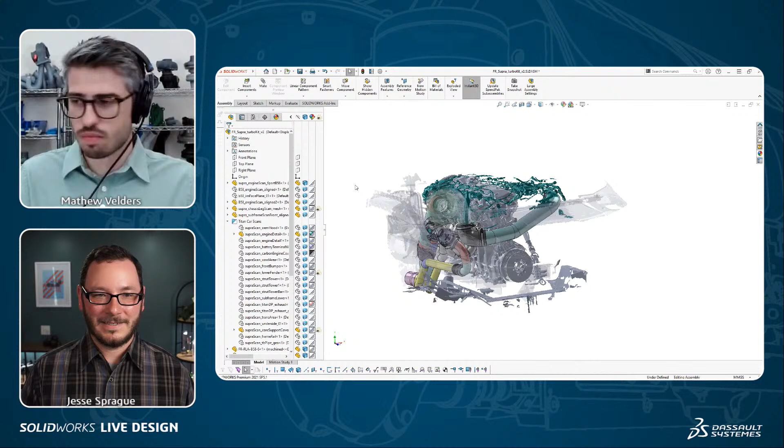Amazing. Well, is there anything else you'd like to show us while we're here? I guess we are getting around that point in the episode. I could probably stay here and talk about this all day. Somebody's going to have to get the shepherd's hook to get me off. But is there anything else that sticks out to you that we haven't talked about so far? I don't think so. I think we've covered a good bit.

I think probably my key takeaway is that with some pretty standard basic CAD features and functions, you can get from a concept to a finished product like this.